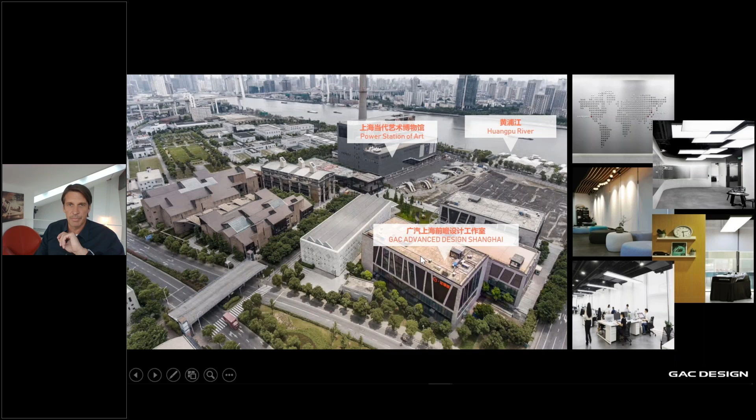So the studio in Shanghai is, if anyone knows Shanghai at all, in the South Bund, near the Art and Design District. So it's right on the river, fantastic location. We're next to the Power Station of Art, right on the river. It's an older building, which has a lot of museums and bars and restaurants around it. So Shanghai-wise, it's a great location.

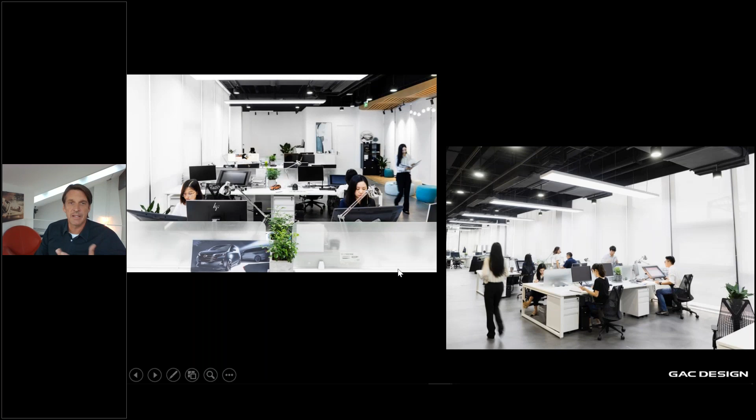It's sort of a very large industrial building. So we have an open space, very light, all windows. It's a historically protected skeleton of a building that just has a glass box around it, basically. So we have a wonderful open air feeling to the studio. In the back of the bottom image, you can see there's an area where we can do scale clay modeling. And of course, all the vendors around the Shanghai area are within an hour or two drive for making everything, including the show car that you're about to see.

So let's get on to the interior of the Eno 146 and start with the fundamentals. Wind shapes not just the exterior, but it also shapes the interior. It's incredibly important that we get the cabin form down quickly. So from the very beginning of this project, we wanted to create the best aerodynamic vehicle made. That was set out from the very get-go as an innovation premise. So we have our company pillars of innovation and experience, and I think this vehicle hits on both of them perfectly.

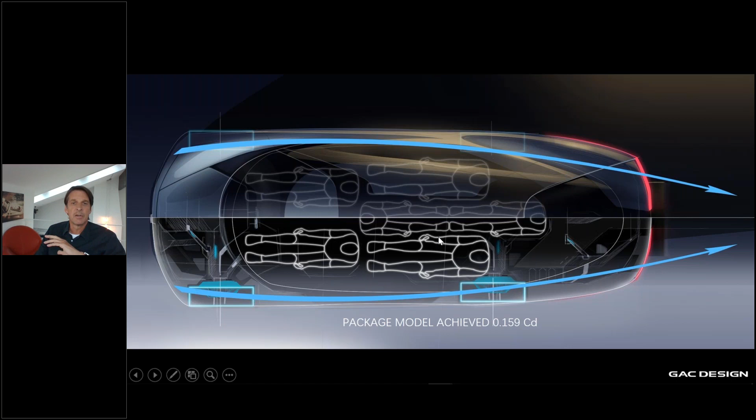So early on in the project, we had the designers in the Shanghai and Guangzhou teams work on a digital model that would get us quickly to a decent CD number at our target, but also solidify the cabin space, because as that is critical for aero outside, it's of course critical for the interior package. So our first goal was to get to a decent base model with a good cabin that we could more or less freeze. And the first model we produced actually hit a number of 0.159, so that gave us a great base for the exterior and interior teams to work from.

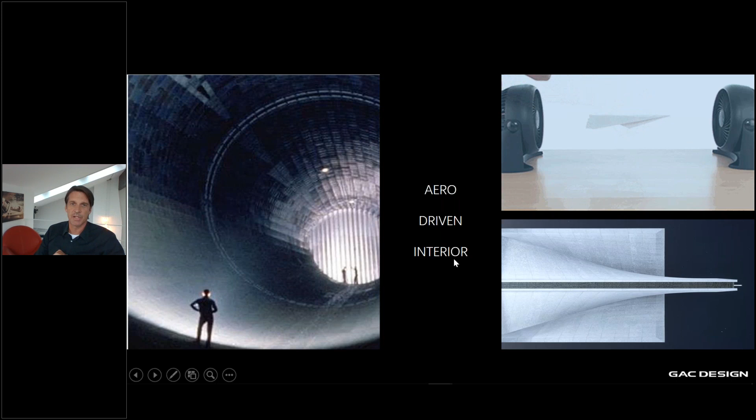So thus, the interior is incredibly aero-driven. The outer cabin form just is what it is, and we had to deal with that. We didn't want anything too small because frontal area numbers will get better. So there was that trade-off between how big and how small it could be.

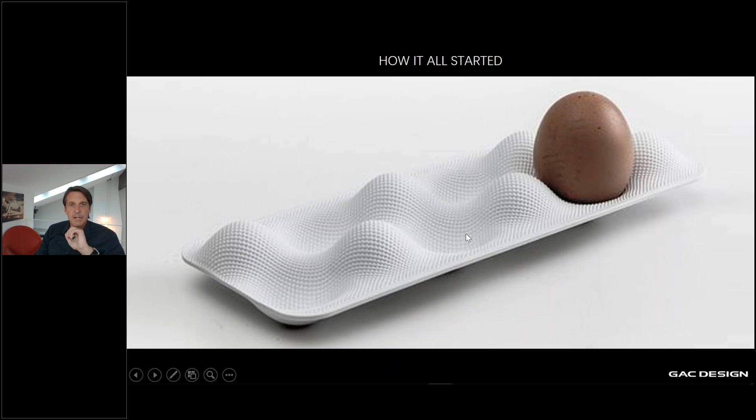So regarding the story, this is how the story came together with the physical world. We had in the beginning some ideas already in place of different functional zones for the interior. We called them Smart Me, Eco World, Healthy Us, and GAC Joy. And these are different activities, but they're also different purposes for each individual passenger or pairs of passengers within the vehicle.

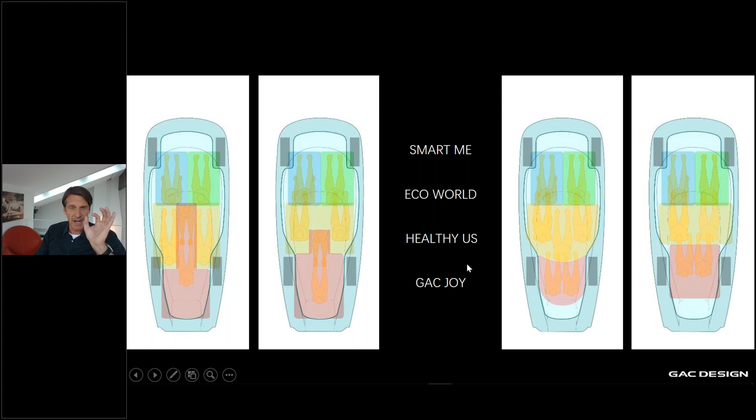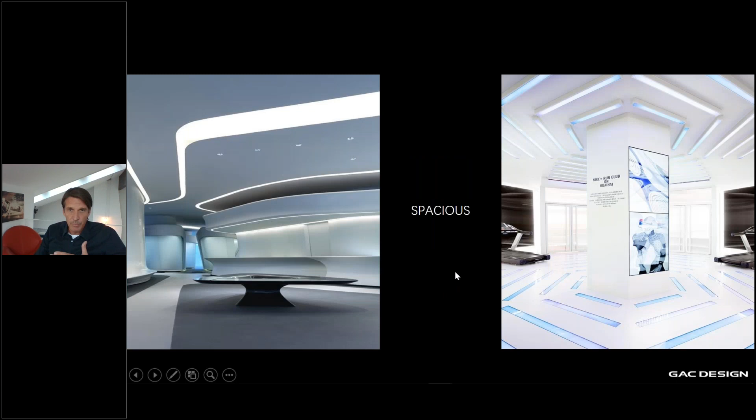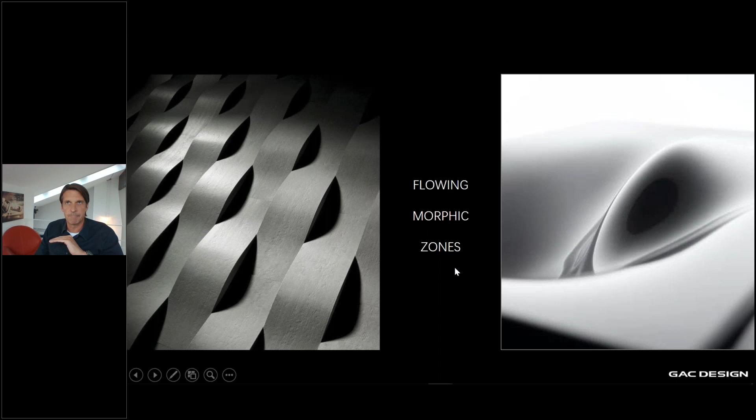So at this point, we had a basic cabin form, plus minus, but we were looking at scenarios of how many people we could get in it comfortably without being ridiculous. So we needed to have it spacious, even though we were limited by the cabin size. We tried our best to make it as spacious as possible. We fell in love with these flowing morphic zones so that one area could flow into another, even though they had different functionalities. So we looked at these waveforms and different activities of interaction physically and also visually.

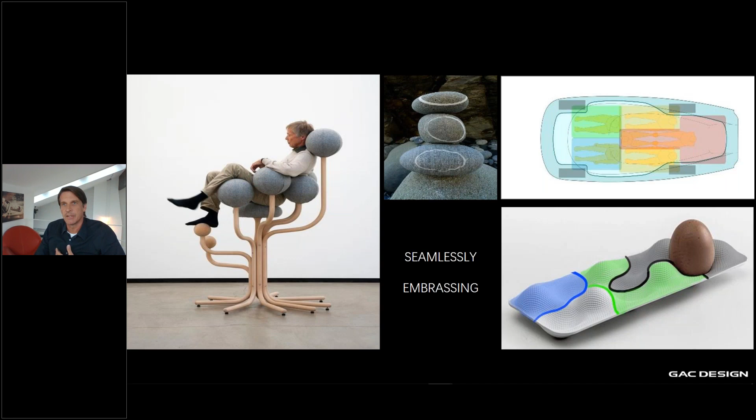So we called this seamless embracing. We wanted an environment that was comfortable, accessible, but still would make you feel good. And if you wanted your privacy, you could have it. And if you didn't, you didn't have to. So it would be flexible.

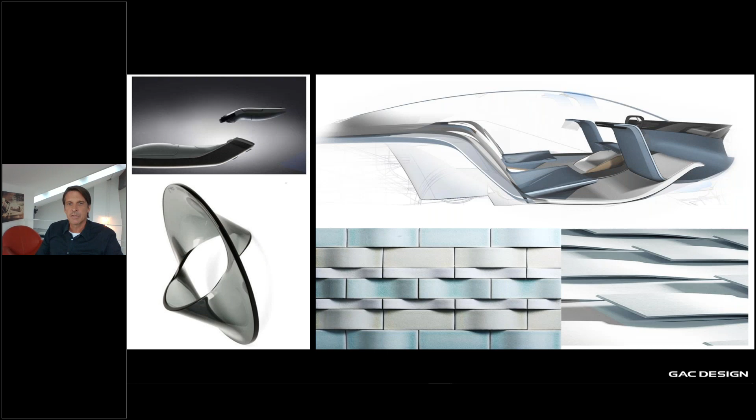And this was a key sketch that sort of got us going. It started to develop these wave forms and then had the different zones sort of labeled. So philosophically, this sketch helped a lot. So we continued with the lightweight feeling that we wanted things to appear like they were floating, not connected, and still have these waves coming in and out. So that was the premise we took forward with the theme.

In the beginning, it was a little bit stiff, but we kept pushing to keep it more and more fluid with each iteration of the design. So by this point, we'd settled in on the 2+1+2+1 package, which is completely centered around the extended Chinese family. So you have the grandparents, you have the parents, and you have the two kids. That is a typical scenario.

And we thought, well, if we're going to make this vehicle spacious, why can we not accommodate the extended family? So imagine a best-in-class world aerodynamic vehicle that just happens to seat 6. That's never been done before, especially in this type of scenario atmosphere.

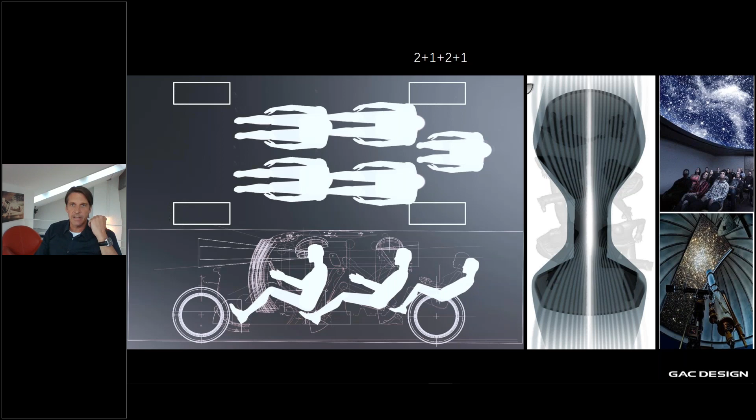So that was the rough package that we all agreed to, but we wanted it to be open, so the roof, even though it was going to be mostly glassy, it still needed to have a structure. So we wanted to have this observatory feel that when you're inside, you can still see through things. And I think that came through quite well in the design in the end.

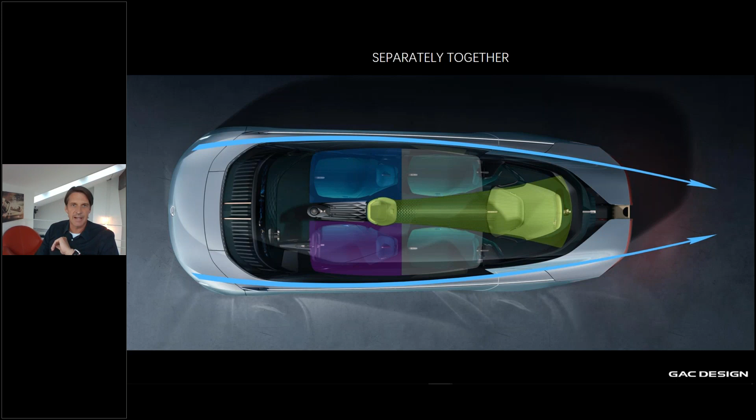So this separately together motif, we had the different 4 zones of function, but they were also paired off by members of the family. So I'll get into a little detail on that, but the central zone would be the joy zone for the kids. The second row for adults was the mother and the grandmother, and then the front for the father and grandfather. So sort of a traditional seating setup you would expect to be in a minivan, such as this.

The interesting thing about the rear seat is that was the most compromised. So it's a singular seat, he's a teenager, he or she can be on their own, but the seat would move 300 millimeters in X so that person could be either 150 or 170 centimeters tall. So it was still a flexible zone area, even though the most compromised.

So here you can see in the final design the flow elements, the waves going in and out of the seats. I think it gives you this very calming atmosphere, and the CMF, which I'll touch on, I think also contributes to a very relaxed, calming atmosphere.

So the joy zone is the central epicenter of the interior. In the back, you have the teenager, and he has all the coolest toys in the world. He's got his VR helmet, he's got his gaming units, he can do music. You can see there's 2 individual speakers there, on either side of the seat in the structural unit. It's a really cool getaway zone for that particular person, which suits the proportion of the cabin anyway.

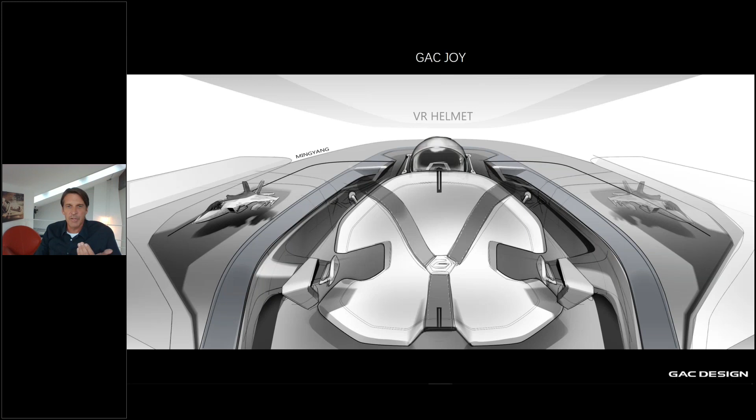But it also can come forward, so he could interact with the mother and grandmother in the front if wanted. So it's a very flexible and fun zone. And this is what the rear passenger would see, staring right at the baby if there is one. But we also have a way to remove the baby seat too, so we'll show that.

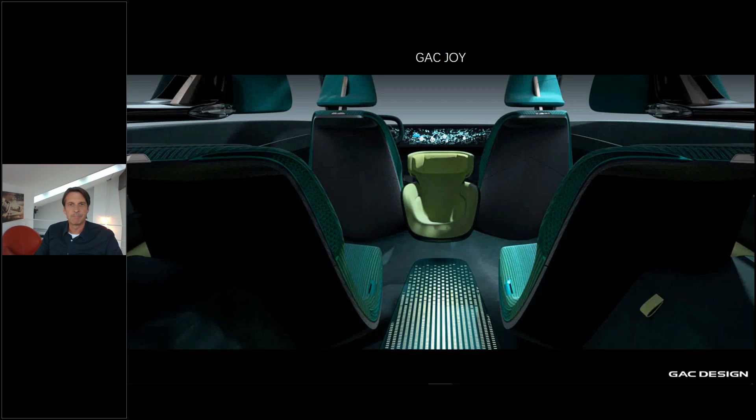That joy zone has what we call the central piazza, which is a lit element. The floor was actually lit. You probably didn't get to see it in the actual images, or in the show car in Guangzhou, but it does light up with the flooring elements nicely. And there's lighting on the roof compartment also, so that lighter color of the central part of the interior really pops out.

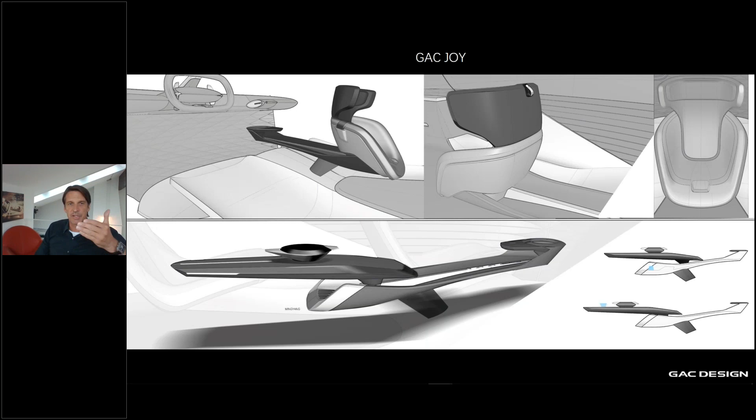And as I said, we had designs that unfortunately we didn't have time to build. We had plenty of ideas of what to do if the baby seat's not there. We could pull it out, put it on a table, have tea for the people in the back; we had a lot of flexible options. But point being that with everything that you see, you couldn't see the structural units. Everything appeared to be super thin, lightweight, floating, but still structurally very strong. There too, the driver interaction follows the same philosophy.

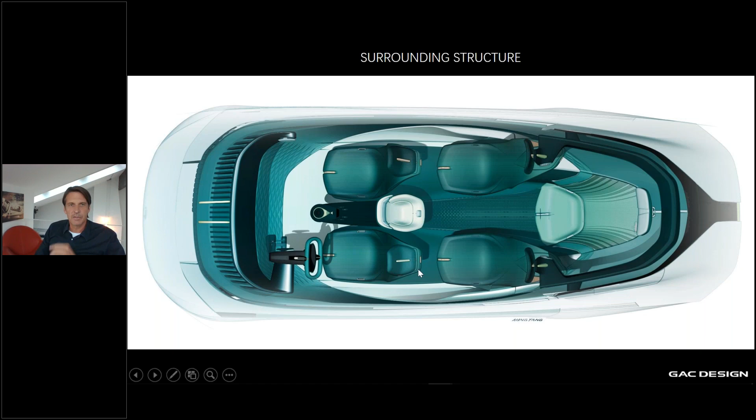The surrounding structure is interesting because it is structural elements in the front and the back, but it also houses all the technical features. So all the screen works, the steering wheel, the sound systems, even the back area where it's connected to the back of the second row passenger seat headrests are there. So it was treated very differently, but it would hide the technology as best we can until it was necessary.

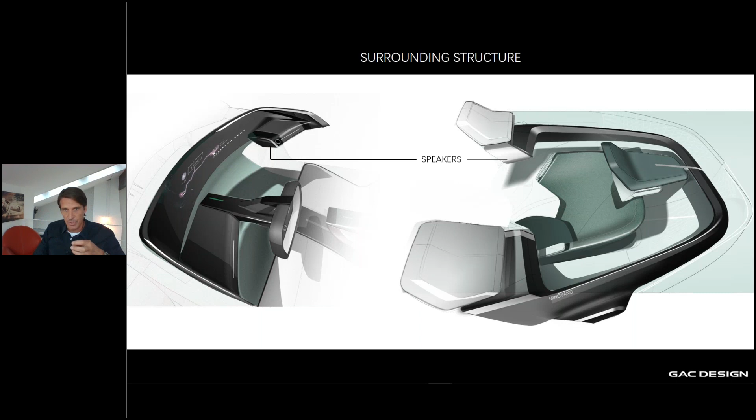So you can see here where the speakers are actually located on the front IP, on the IP end. If you want to call it an IP, it's really a screen. And then on the rear, you have the headrests and the speakers all connected to that structural element, which goes behind that last rear person seat. And here too, you can see how the UI UX is implemented into that front structure.

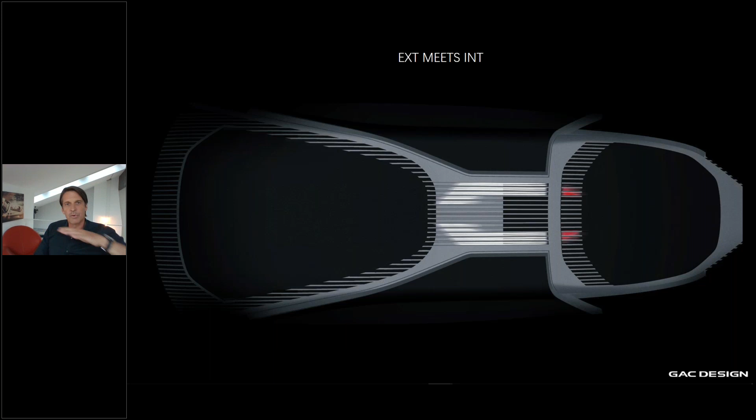The roof structure was the biggest challenge about co-locating because we had to come up with the roof structure. This is where interior meets exterior. So there was a lot of back and forth with the LA guys as they were developing the exterior theme. We had a cabin as a base, but we had to really get down to the millimeter in getting this element correct. So that was a lot of back and forth, but we ended up coming up with something I think was really spot on.

It was challenging because it's so huge and the doors were hinged to it, and the lines could get wobbly real easily, so we had to be super tight to make sure this thing looked good. And I think in the end it came off quite neat with this slatted line feel, which is both in the roof and on the front end, and the interior also we have elements of that. It's an overriding detail that happened to be functional and structural, and I think it worked quite well. We still had this very open appeal to it.

So when I hit on the CMF story, which is also a fantastic cultural kick, the whole CMF was based on the Chinese lotus flower. Specifically meaning you have the center as the seed. In our case, it was the kids, and they would have the brightest color. And then as it goes out, it would become darker until it goes into the shaded lake or the dark greens, the leafing elements. So that was the philosophy when you look at the interior from the top.

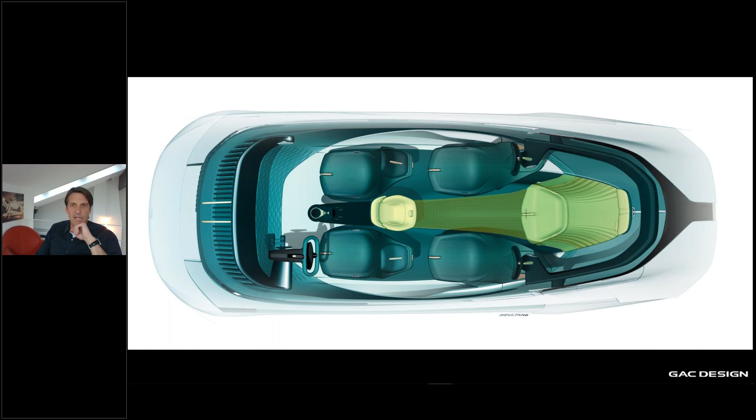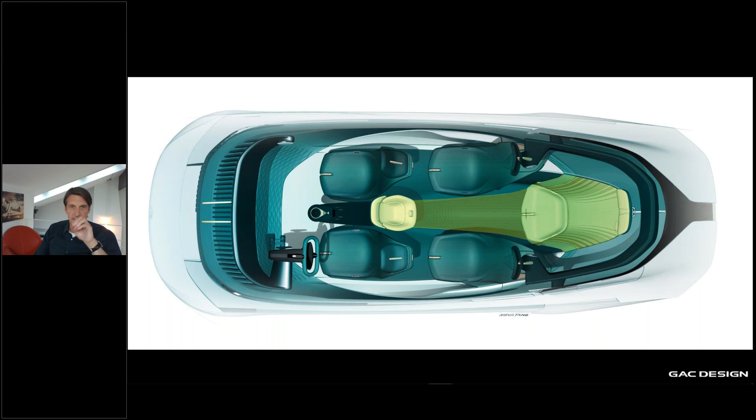You can see the centerpiece is quite light, and then it would go out darker. Look at this as a sketch, but in the real model, it actually fades out to black. Literally, the boundary areas are almost black, or piano black, actually. And I think that fade is actually quite clever with the whole motif of the lotus flower.

Detailing for CMF was done completely by the Guangzhou team, led by Stefan Chen and also Dove. They did a great job in the Guangzhou facility of pulling together all these different materials to make it actually feasible and work. And we went back and forth even on the lining of the seats that follows the roof lining, had to coordinate and still stitch and work well. So Stefan and Dove in Guangzhou, they led the CMF completely.

So then you had a bit of a triangle going on again. So we had Shanghai and Guangzhou and LA, but we could often meet between Shanghai and Guangzhou. But I think the CMF team did a phenomenal job coming up with something symbolic but also very unique and culturally authentic. The digital side was in the UI UX.

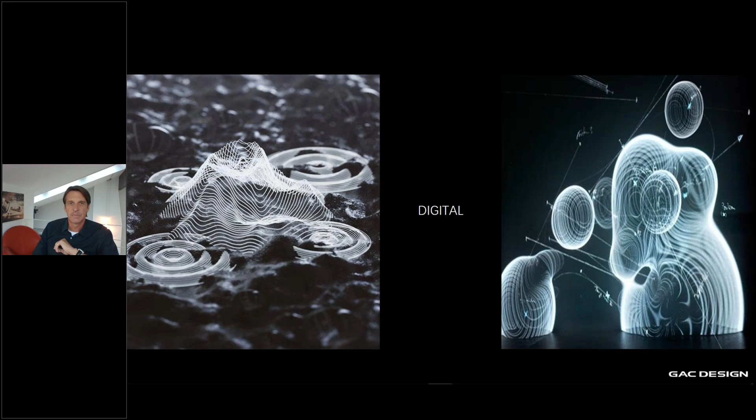So all the digital detailing, whether it be interior, exterior, or even the UI UX, we wanted to have all the graphical information done with a digital feel. That being housed completely away in the front IP structure, and also the steering wheel would not come on until you need it. So here you can see a quick animation of what it would appear for the UI UX.

What we did is we actually used the Adigo system. So the Adigo system is a system that's in place now. So we wanted to take the actual production system and then adapt it to these 4 different zones that we have in the interior. That itself could be another lecture completely, how that UI UX interaction works with the 4 different zones, what the 4 different zones do in that environment, the parents, the grandparents, the kids, that can all go through this Adigo system in different ways, interact, not interact.

Really deep, long story that we didn't have time to get into in the launch of the vehicle, but I think it did help us to use something that we had in hand, but still we could implement into a concept. So it showed the flexibility of the UI UX system.

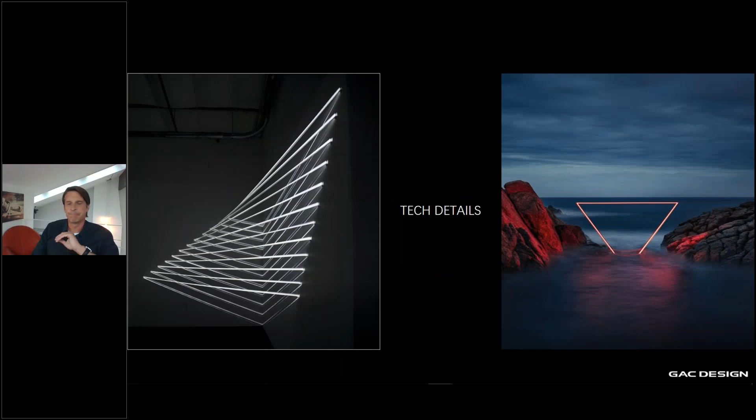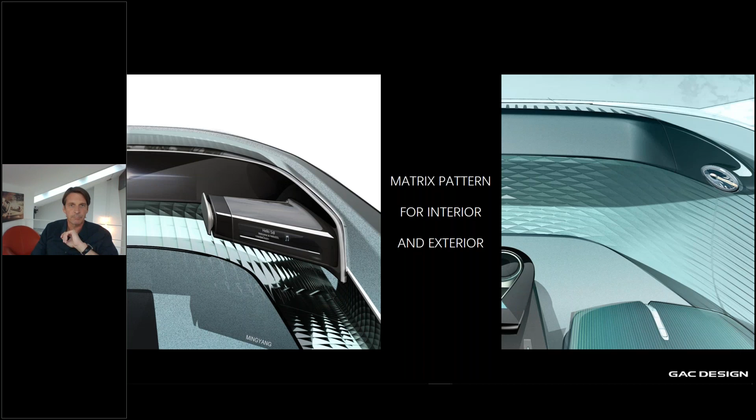Technical details for the interior were very geometric. So we had this geometric pattern in the wheel well area that flowed into the doors, and there's a similar pattern that also flowed out into the exterior. If you look at the rear of the exterior, it also has a very cool geometric digital type pattern. So we picked several that worked well and just ran with one in the end. I think it came out very interesting in both the exterior and interior. As you can see here, how it flows from the wheel well and then into the line work in the doors.

We spend a lot of time working on the jewelry. The devil's in the detail. The closer you get, the better it gets. Especially with the ends of the technical areas like the IP and the structural zones where these speakers are. We had these 4-part, beautifully done jewelry speakers. So it looks great in photo when you finally get to see it up close.

So collaboration, this is the key part, and these are my last few slides to talk about how we collaborate. So we have VR systems, obviously, in Shanghai and Guangzhou and LA, and we can sit in an interior here and share it in theory with the guys in Guangzhou or even LA. So for the show car, we could do this quite easily, and we do it also for other projects. So we use our VR system in Shanghai studio quite regularly because, as Fan says, we can't be there every day. So this becomes quite handy.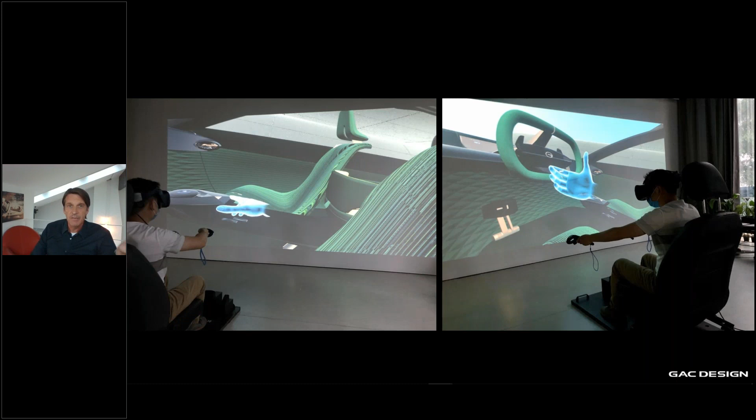But then here you can see what the interior of the vehicle looks like. For example, I'm looking at the same thing that my counterpart or Fan is looking at in Guangzhou, or even a third location, so that we can share ideas on the fly as we're doing VR evaluations of, say, an interior or exterior, whichever.

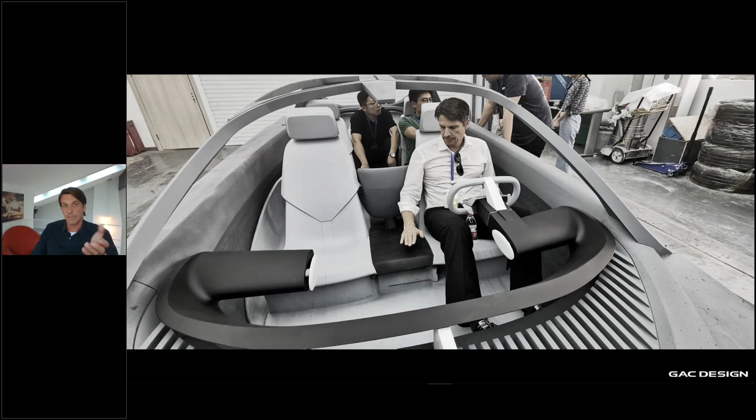But then we would do, in this case, quick foam model mill-outs to prove the ergonomics in the physical world. And sometimes we'd find little things like, oh, the steering wheel is a little low. Oops, okay, so we'll pick that up a bit. And so I think it's still important to do foam prove-outs, especially with an interior, because you will find a few things that are not quite right. But generally, we were pretty spot on.

And since then, I think a lot of the learnings of this vehicle, not just for story, but also for interior package, and of course, the great aerodynamic number that was started from the beginning and only got better as it went through, as you'll see in a minute from the LA guys. I think it's just a phenomenal achievement. We're all very, very happy to have been part of something like this. So, yeah. So that's our quick story for the interior.

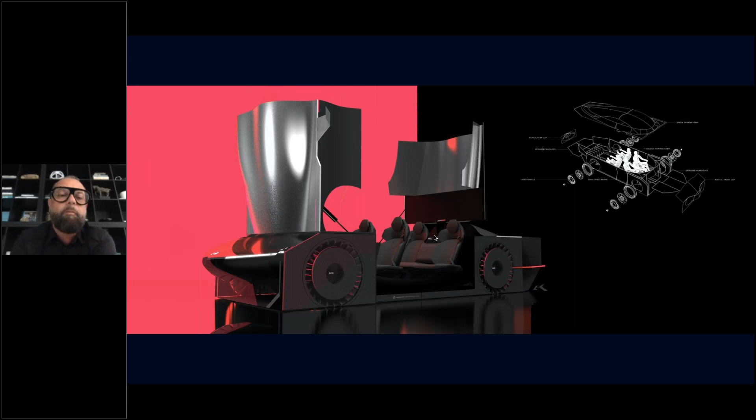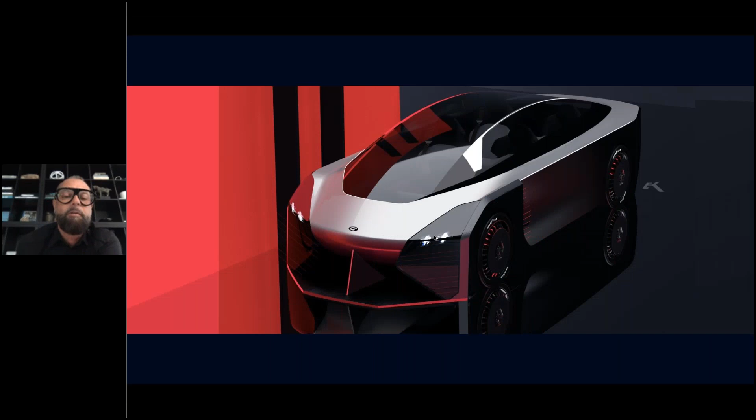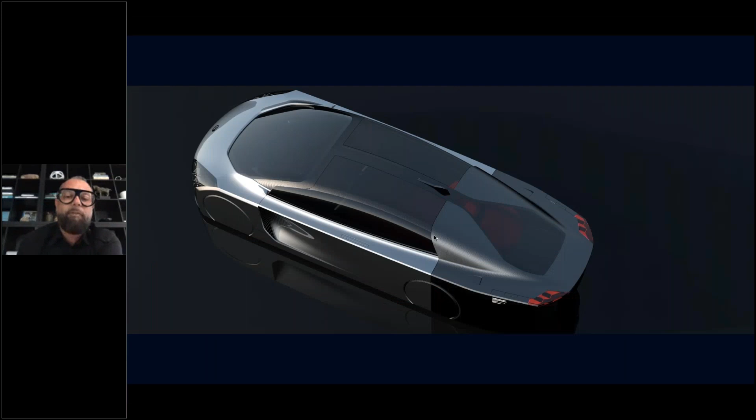Number one was designed by Eric, and it's another take on aero with two bodies meeting each other, one softer and one harder. And this actually achieved a pretty good aero value, and after a little refinement with Ling and his team in Guangzhou, we came down pretty good, believe it or not. So very graphic and very stark and quite a statement.

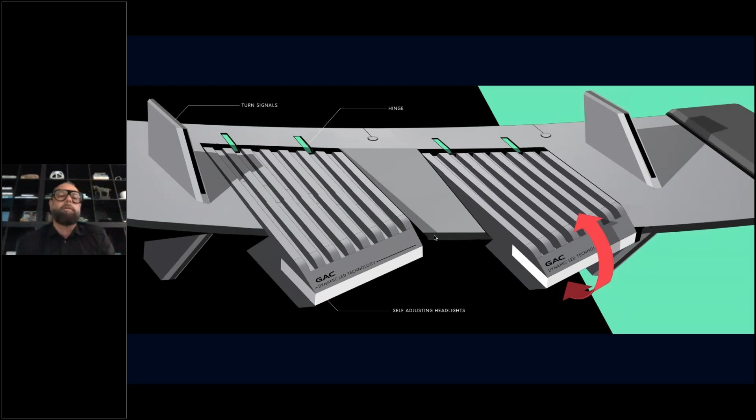And again, we're doing a lot of details and thinking how we could have some airfoil lamps and further enhance the aero look of it, even in the small details. And practical solutions. So we think all the time about practicality and unorthodox design solutions. Here is how we could minimize the rear hatch and opening for the luggage and do it in a different way.

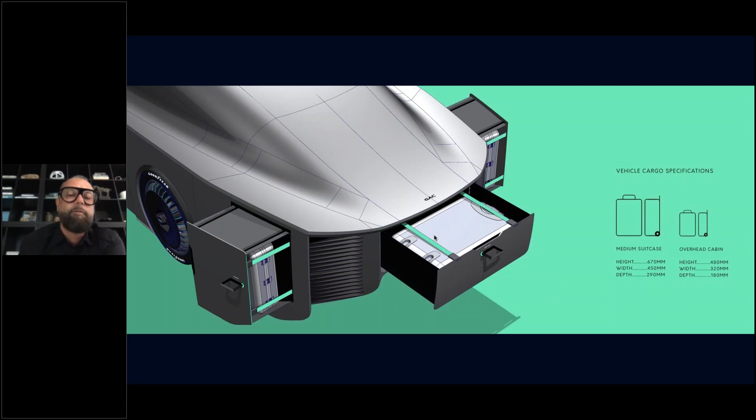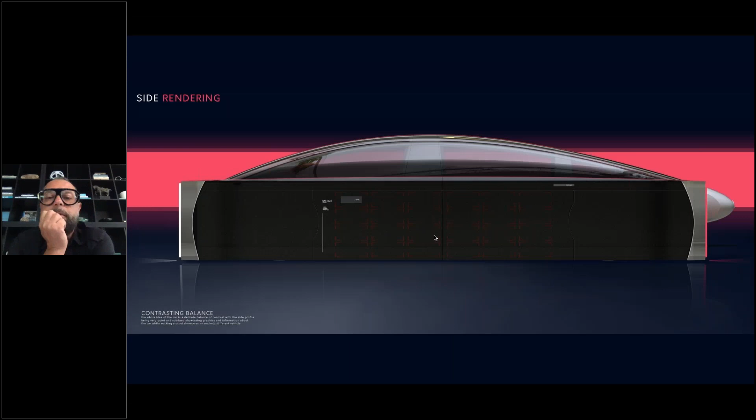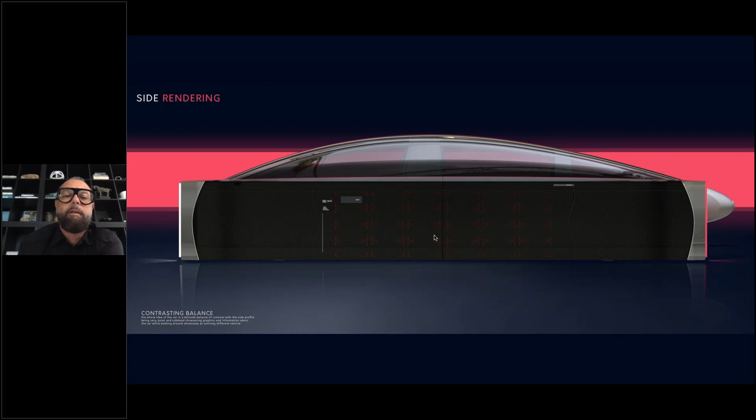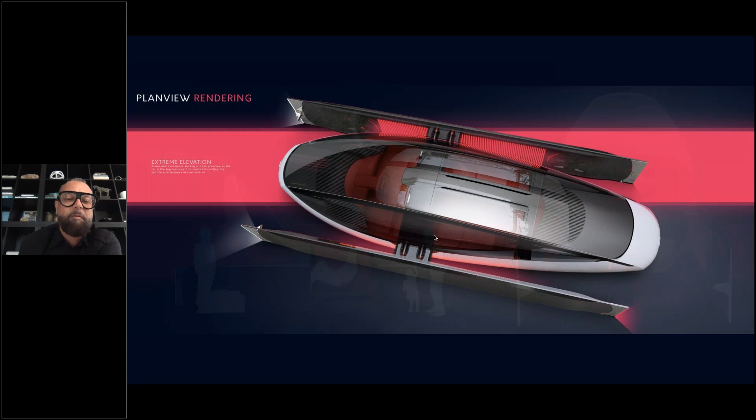This is a car by Ilya, and we just thought, why don't we rethink the whole platform and where we place the batteries? And the surprise is, when you see this in a top view here, that we actually have the battery packs on the side, almost like an X-wing fighter with a teardrop body in between. This was very, very extreme, but we thought we have to go there and really rethink what we're doing. Not very practical for a production car, nevertheless super interesting.

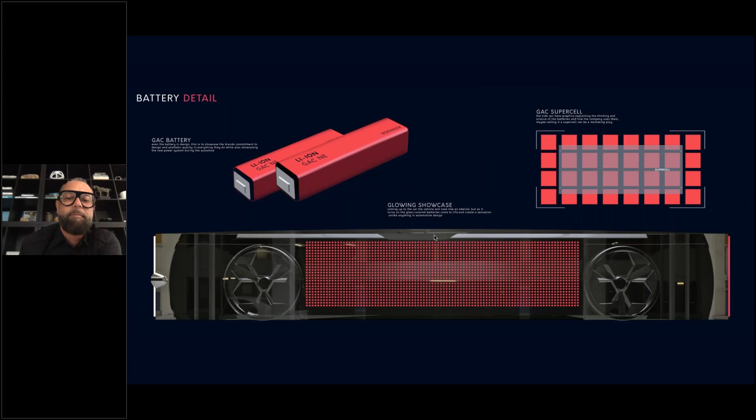And again, these are just some proofs of how we work out things in detail and so on. The devil is in the detail. So this is another proposal by Nick David, who is my exterior chief.

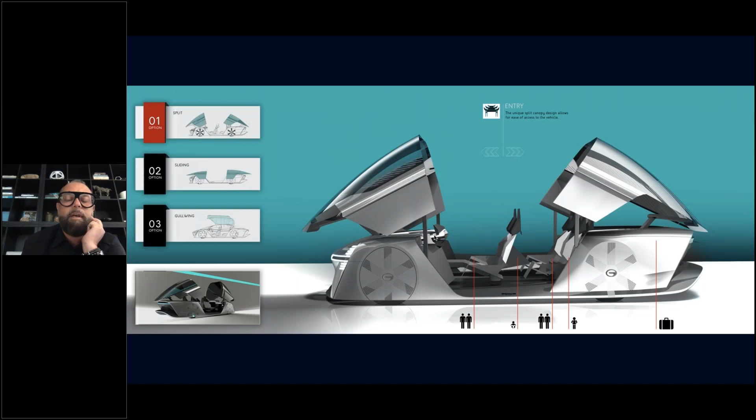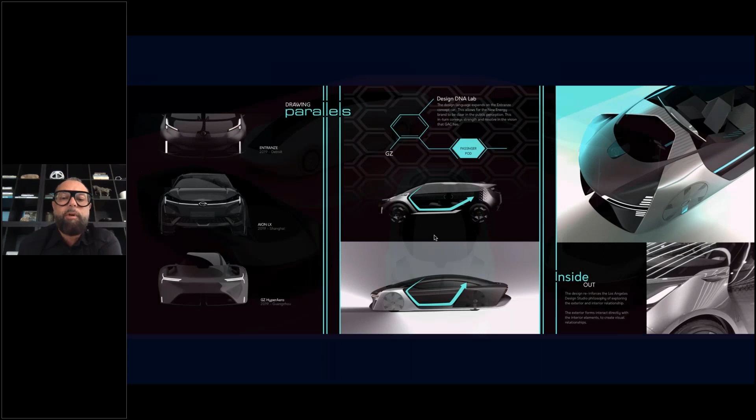This achieved very, very good aero very early in the project phase. And we also see how we still remember our previous concept and the DNA that we apply there. And this is the roundup of the contenders leading before Fan made the decision for the car that we started to develop into what then became the concept car.

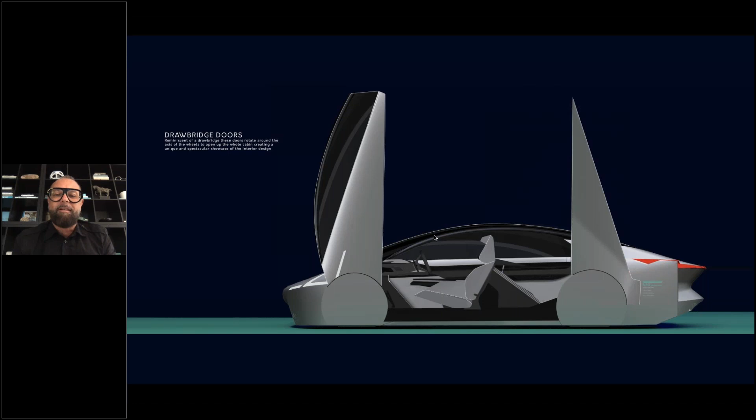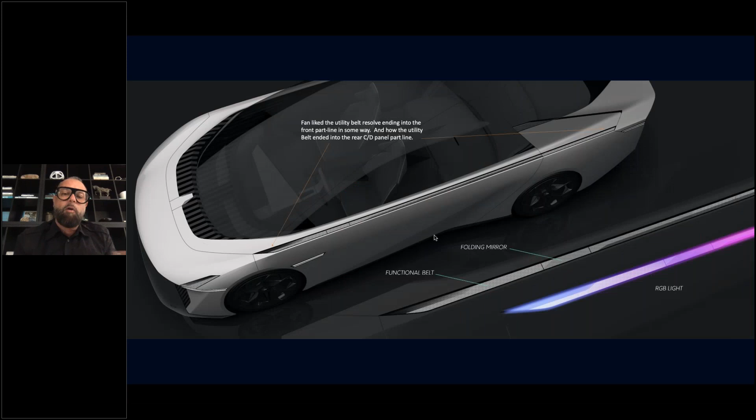And I just flicked through that. Door openings, we did a lot of various door openings. This is a little bit aggressive, but really interesting as well. And this is the one that finally became reality. And here I just let you in a little bit how we work. Every week we have sessions with Fan, and we write the comments, what he says, and have this ping pong all the time. What was liked, what needed to be improved, how can we develop it.

This is interesting, the utility belt which then houses a rear view mirror, and the car doesn't have a lot of bling on it. So we did an electronic part of that, which can communicate with the light and when doors open and so on, instead of just having a chrome piece there. And it also needed that surface-wise to tie the car together.

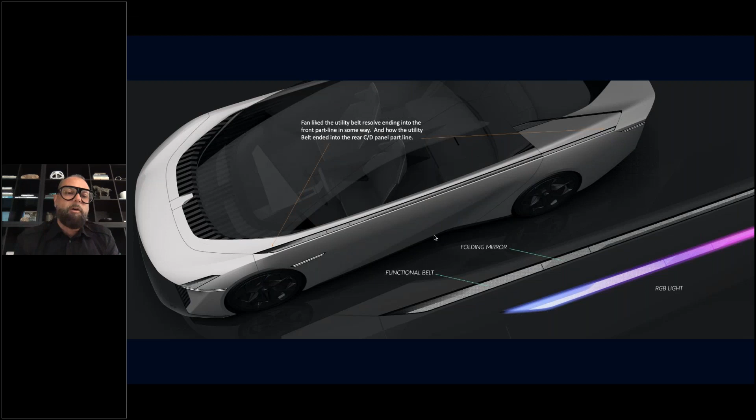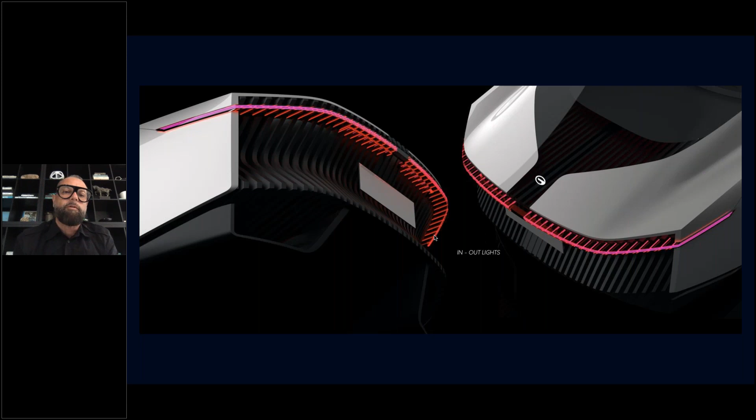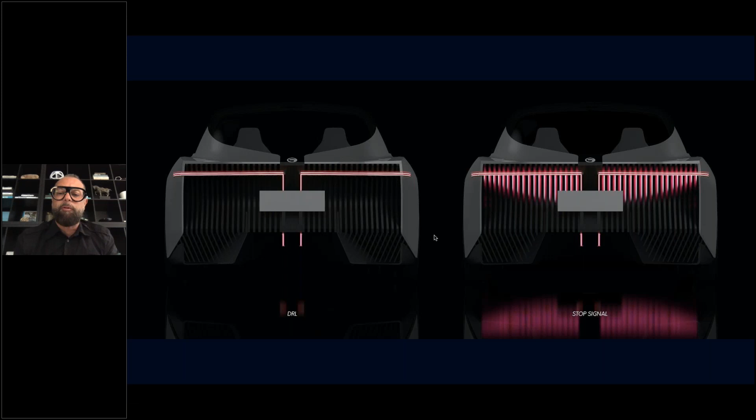And here you see more development. We work very much with an inside-out philosophy. It's very, very important for us, and not to condense and compress the various details into the body, but let them flow and breathe. And here you see an example of the stop signal, what the lights are doing. And the graphics we started on the Entranze, and it's quite iconic. And we work more with it in the future as well, that you will see.

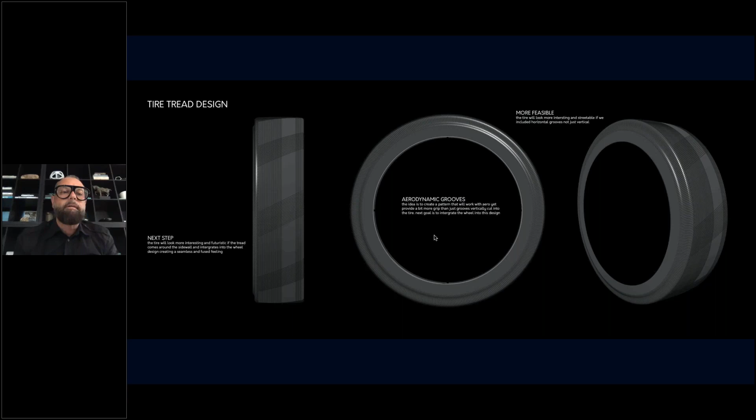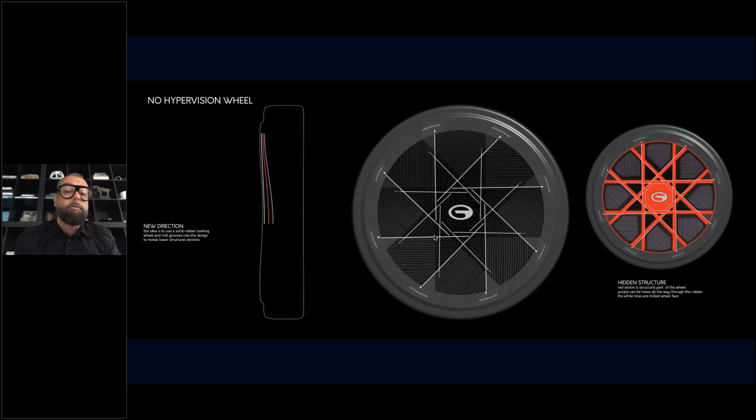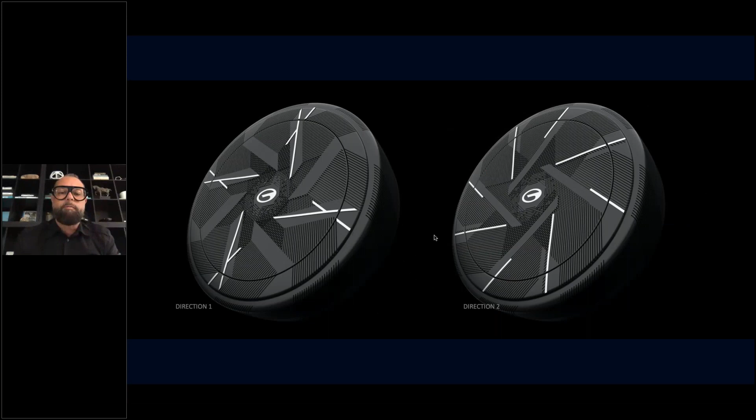Here we're getting closer. Patterns and graphics and parametric is very important for us. It's not the main thing, but it has to be there just to give that extra little touch. Wheels, tire, tread design, and the wheel is super, super important, since we didn't want to go for covered wheels, and the covered wheels is the enabler to get down to a really good Cd value. We invented another function that we call the HUG. And it is a function that comes and hugs the wheels, and I will come to that later.

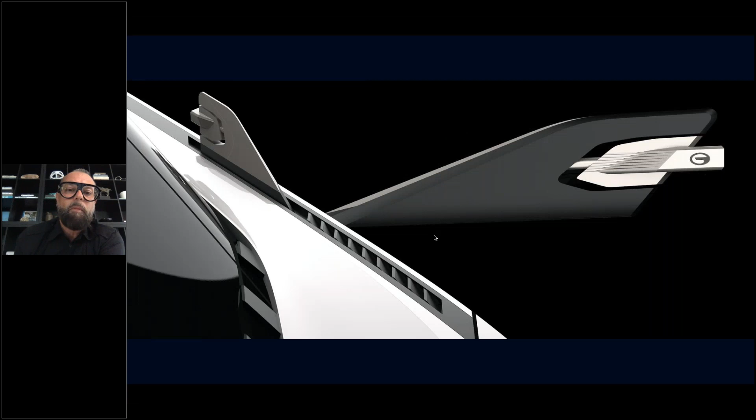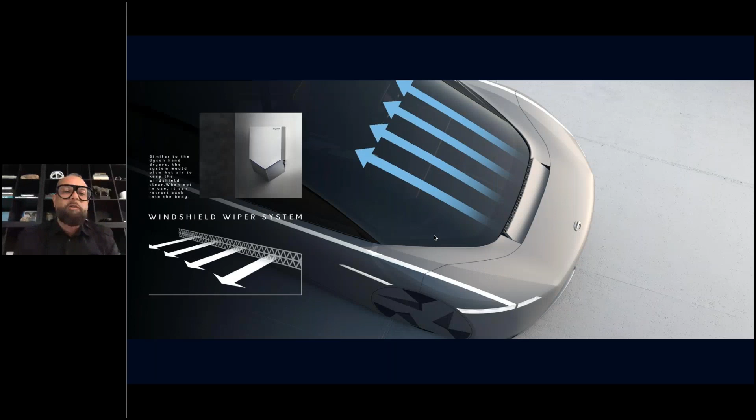Early development of the rear view mirror. And here was the final one, which is a sharp wing and continues the line from the front fender and up. And some ideas how to do this car without windshield wipers.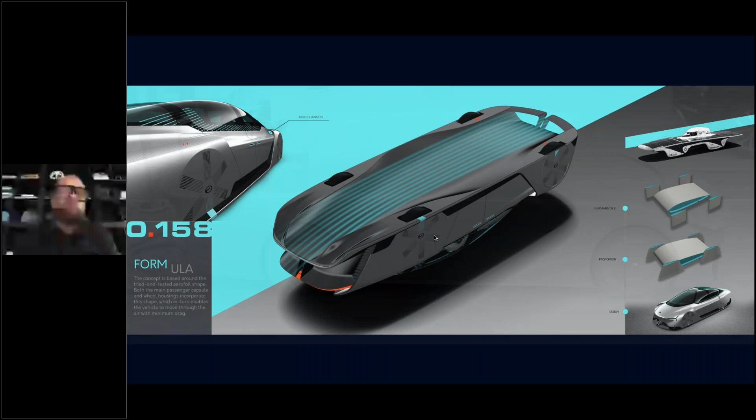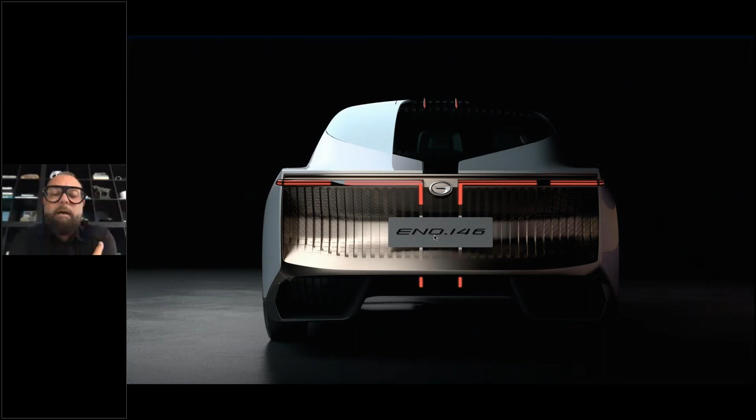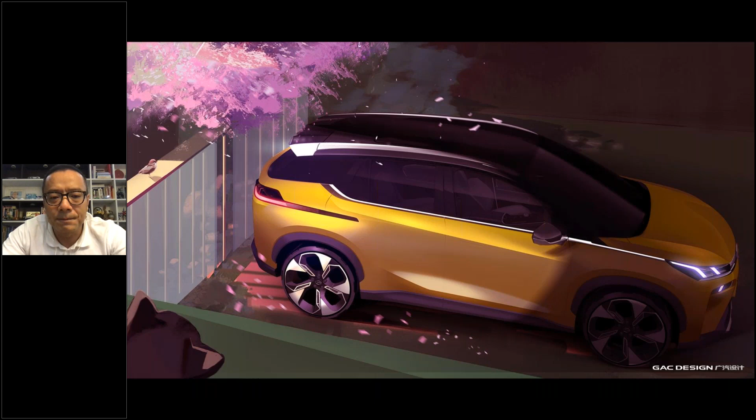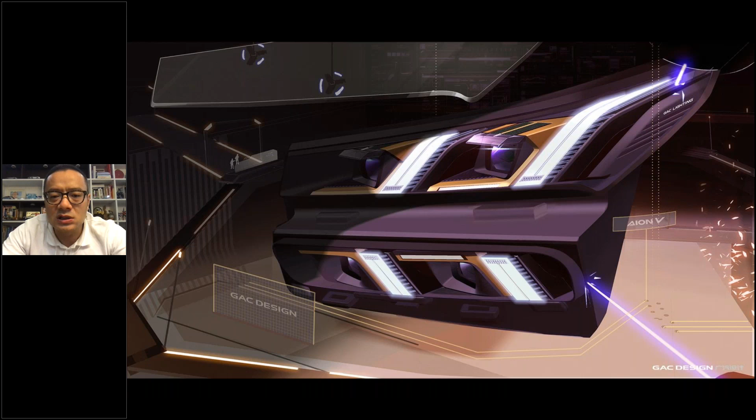I think this set of renderings really presents what we are trying to achieve with the EV designs: to create something totally new, but still fit people's perception of how a car should be. So there's always a balance. How much of the traditional automobile perception you should keep for the car, and how much of the new EV technology you want to bring to the appearance of the car.

For us, we concentrate on creating new form language, as well as creating some very remarkable details. Like this picture, this is the headlamp, for example. We try to divide the headlamp into almost 4 pieces, with the daytime running light separated in 4 vertical pieces. They become visually like a lighting claw, so you could see this car from a far distance and recognize it. This is very new. I don't think any car has done this before, but I think for an EV, this is something very remarkable.

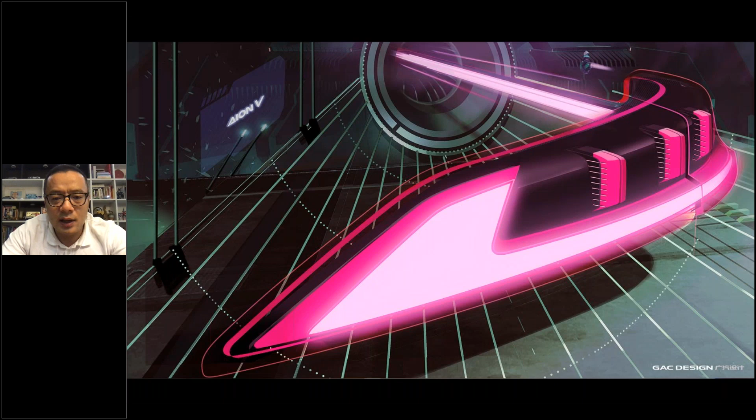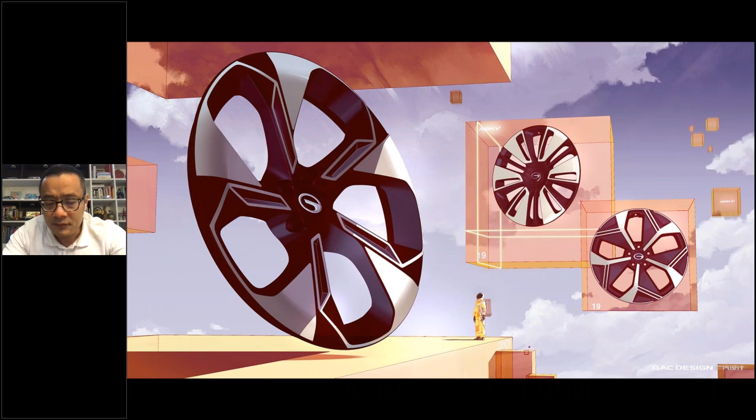And also for the rear light, we take the inspiration from the laser sword, for example, from Star Wars. As you are waving the laser sword, you see the laser light swinging in the air, and this is where we get inspiration from. So as you can see, the rear light continues into the side, and it finishes with the door handle. And also the wheels are very important gadgets on the car. They are like the shoes of the gentleman.

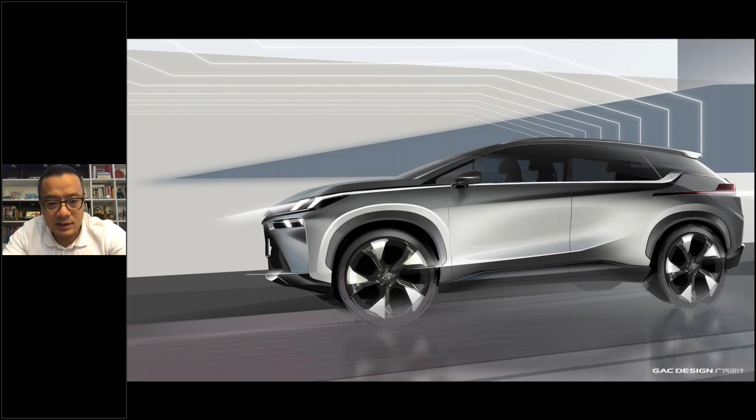Yeah, this is another set of the renderings. This one shows the very good proportion of the car. As it is based on the EV platform, we could get a very long wheelbase, very short front and rear overhangs. And I think this is a kind of dream proportion every designer wants to have. It gives you a very good stance for the car, and it also creates very spacious interior space for the passengers.

From this perspective, you can see what I mean about the rear light. It's like a laser sword swinging from the rear towards the side, and it also helps to create a very dynamic gesture of the overall car. Another view. And also, as you can see, the rear end, form-wise, is very clean, very technical, with some details. We took the inspiration from some other electronic devices. We really try to give it this electric character.

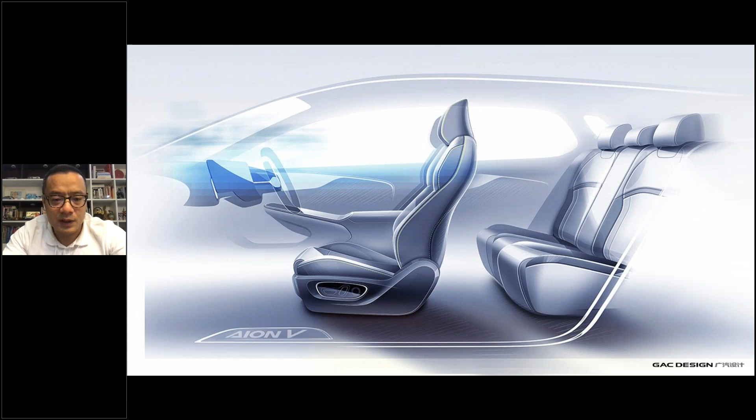The interior of this car is very spacious, of course. When we create the interior for this type of car, we are not only trying to incorporate the so-called high-tech accessories like the dual 12.3-inch screens and some other high-tech look accessories. But as we understand the Chinese customers' needs, they also need the interior of the car to look premium, luxury, with a high value impression.

Because they have paid a lot of money for a car, and the space inside, since they're gonna sit all the time, it should present a certain perception of value. This is a very common demand from Chinese customers, and we're also trying to incorporate this demand into our design.

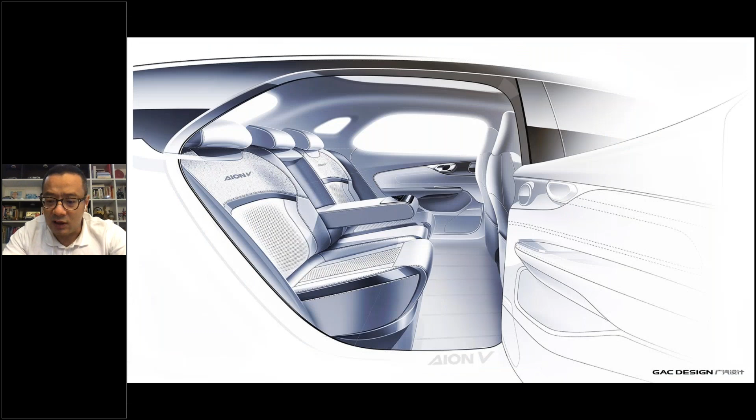So as you can see, the overall impression is still very kind of luxury-like, with a floating central console and also surrounding the IP and the doors. And the rear seat is also very spacious and comfortable. That's another perspective for the front end. And the door.

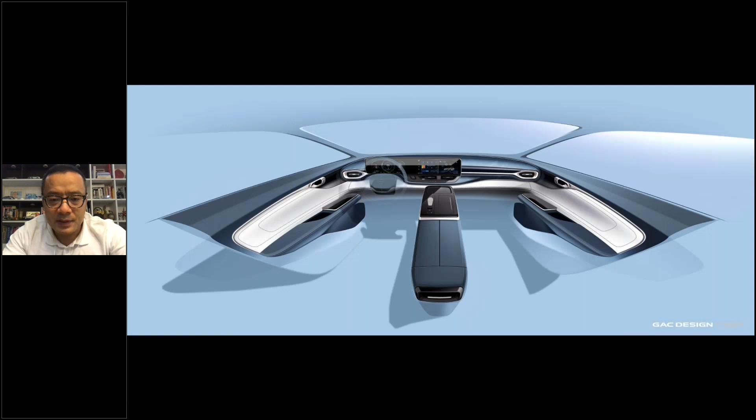I think that's also giving the hint where the future automobile industry will go. We say the EV is the future, but if you cannot keep the cost down, it cannot be the future that everybody could reach. So I think in China, we are working intensively, not only trying to bring up a new authentic design for the EV cars, but also working very closely together with the engineers on how to keep the cost down to make the car more reachable for normal people, and eventually it will be a good replacement for the petrol car.